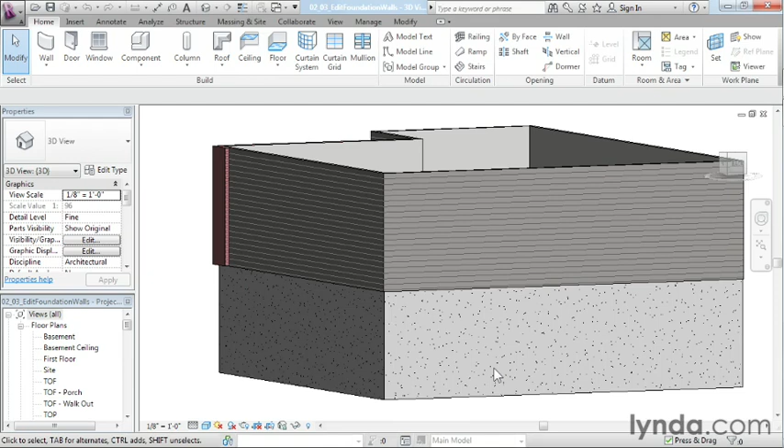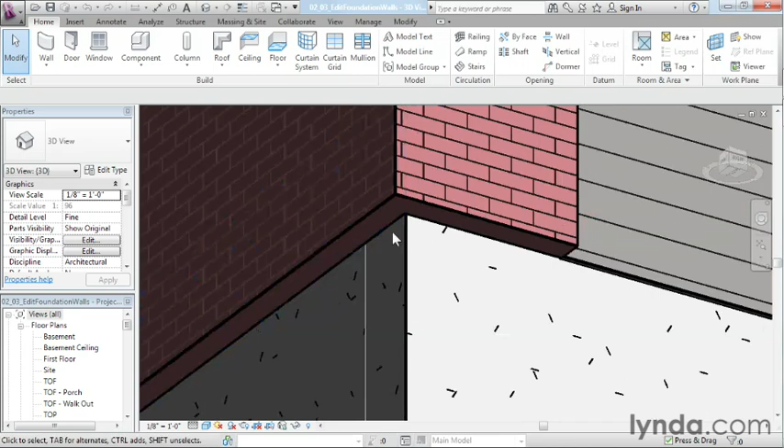Now that we have the foundation walls underneath our structure up above, we can see that there are actually a few issues that we need to take care of first. First off, if I move this building around, we can take a look at this and we can see that there's brick currently floating in midair. Now that's not usually a good thing whenever you're talking about the structure underneath a house. There needs to be something that's going to support this brick. So we're going to need to make some adjustments to our foundation walls there to be able to support the brick.

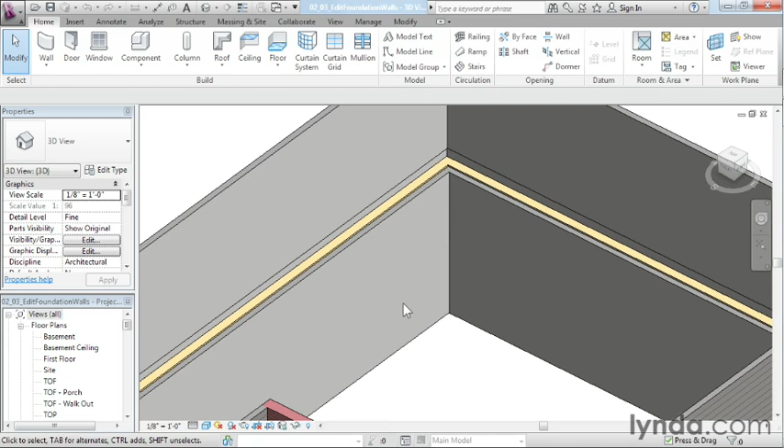Also, we currently have the same type of foundation wall going around the perimeter here. Now, that's not necessarily a bad thing, depending on where we want to look at this. The only thing is, though, that part of this wall ends up having 2x4 studs right here, along with gypboard, in order to frame the wall out. Now, back here, which is going to be our storage or utility room area, we don't want to have any sort of wall framing there, which is going to be an unfinished space. So we're going to need to use a different wall type in that location as well in order to communicate that properly. So in order to do that, we need to go back into our basement floor plan view and start to make a few modifications.

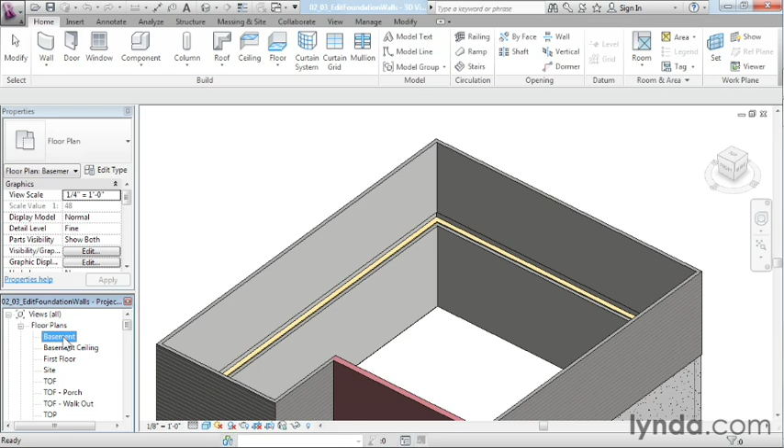Now I'm going to start off by zooming in on this corner of the building. This part of the building has grade going up much higher on it than this end of the building. So the ground is much lower over here than it is over here. As a result of that, we need to have foundation walls that go down deeper in the earth over here as opposed to over here. The reason is whenever the ground starts to freeze, the building might start to contract, expand, move up, move down. And if your foundation walls aren't deep enough, they won't be able to resist those forces. We need to make those adjustments so that it has the right depth of foundation wall in both locations.

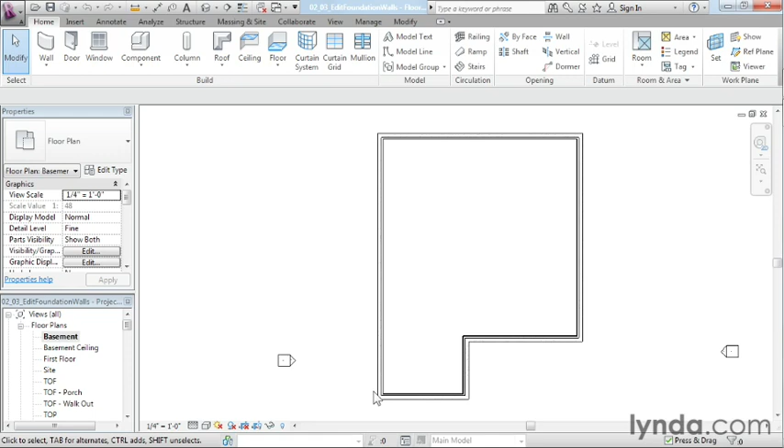To begin with, I'm going to come down to this corner of the building, and I'm going to come up to my annotate tool. Now, there isn't a real nice and easy tool in order to break this wall up into different depths, so we're going to need to use some tools to sort of give us some guidelines, if you will, in order to be able to create the conditions that we need. Now, I selected detail lines off of the ribbon up above, and I'm going to click on the little intersection right here and just draw a little line coming off the side here.

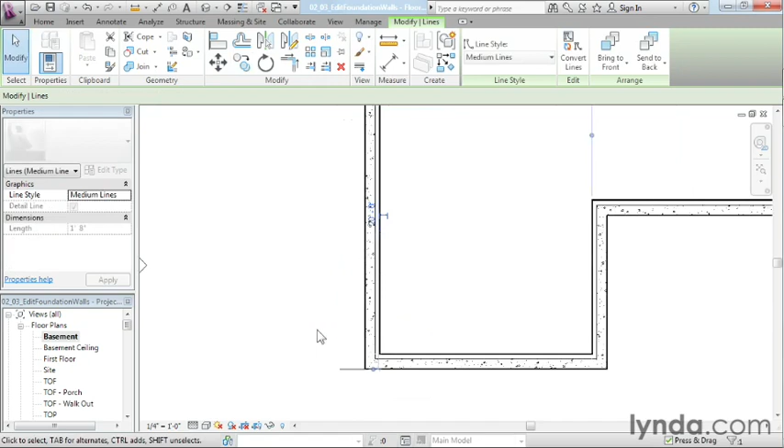Next, I know that depth needs to be 20 feet coming up. So I'm going to select this line that I just drew off of the edge, and I'm going to select the copy command, pick a point, and then type in 20 feet. And that's just going to be my baseline as to where I'm going to be able to split this wall at. I'm going to split the wall right there. I also know that I need to make another line that's just 2'6" up from this one. Now, the reason why I need to do that is that there's going to be no finished material on this little wall section right here, but this wall segment is going to have that 2x4 stud with some gypboard on the outside of it, like it currently has.

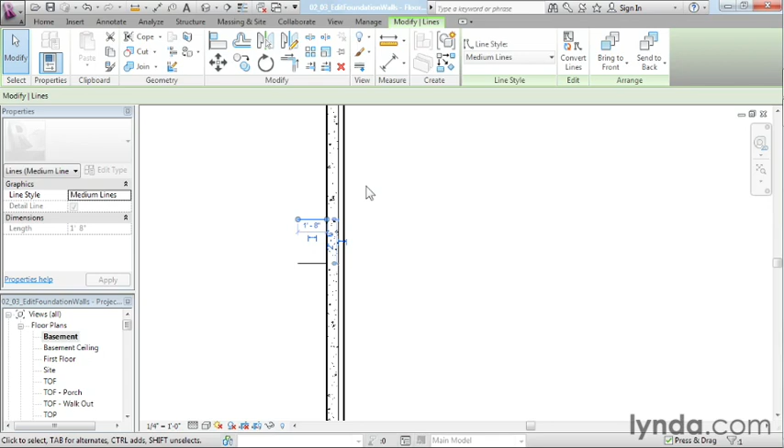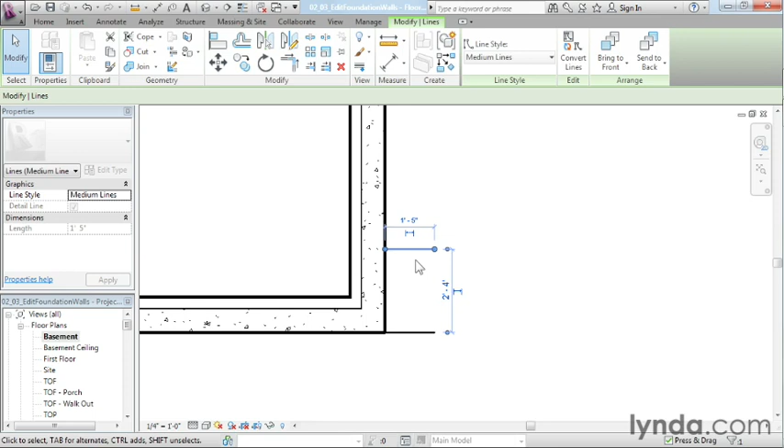Now, I'm going to move to the right-hand side. I'm going to draw in some more of these lines. I'm going to draw a line right here, straight out, and I'm going to copy this one up. I'm going to copy it up 2 feet 4 inches. From here, I'm going to make another copy of this line, and I'm going to copy it up 7 feet 8 inches.

Now we're going to use the split tool in order to split this wall up into individual segments and this wall up into individual segments so we can change the properties of the walls in those locations. So I'm going to select the wall and come up here to the split element tool, oftentimes just called the split tool. And then I'm going to move my little symbol right here. It kind of looks like an X-Acto knife blade.

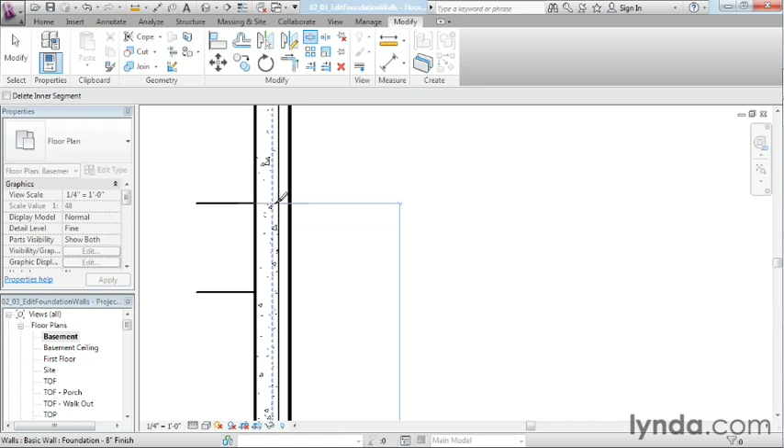And I'm going to move until it's in line with this line right here. And you'll see that gray line show up. Whenever you see it, click and do it again in both locations. If you do it right, you can see that you can sort of highlight over one, over another segment, and over another segment. We now have officially 3 different segments along that wall.

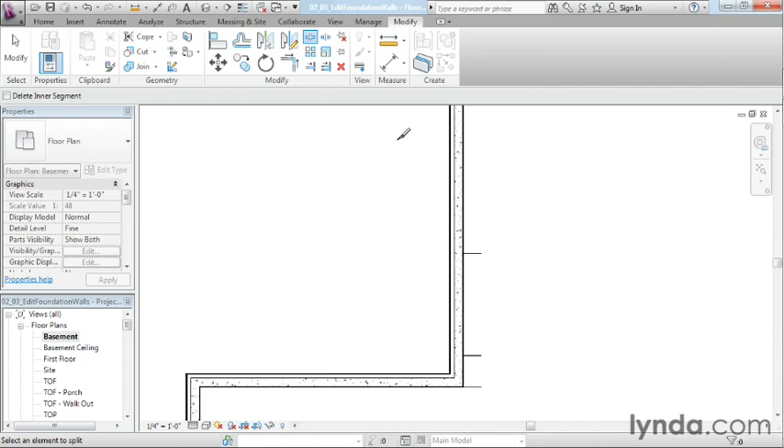I'm going to do the same thing over here next. Select on that, come up to the split element tool, click once, zoom in a little bit just to make sure that I got it accurate, click again. Now I have this wall segment and this wall segment. Now I need to make some adjustments.

The first adjustment I want to make is going to be to this wall right here, as well as this wall here on the side. This foundation 8-inch finish is mostly good, except it's not going to be supporting the brick up above it very well. So in order to support that brick up above, we need to change this to be a foundation 12-inch finish wall. And you can see how it added in that extra little bit of material, which is actually 4 more inches of brick on the outside.

One other change I want to make to these walls, and I'm just going to highlight on both of these again, is I'm going to change the top extension of these walls to be -7¼ inches. I could do -7.25 if I wanted, and I'd get the same results. Just make sure to put in the little inch sign, or else it'll do feet instead of inches.

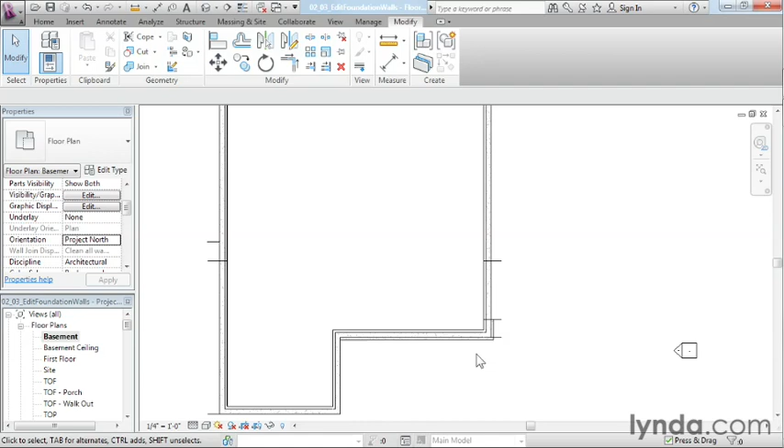Now, what this is going to do is it's going to change this brick ledge, which is the part that got added when we changed the wall type, so that it's down far enough that it can support the brick up above it and have the right appearance that we want on the outside of our building.

I'm also going to select on these walls and look at one more setting here. We're going to take a look at what the base of it's set at. And right now it's set to go out to the walkout. We don't really want that. We just want it to go to the top of footing here. So we'll select on the TOF, the top of footing. And that'll make these walls just a little bit shorter, which is what they need to be because they don't need to go as far into the ground.

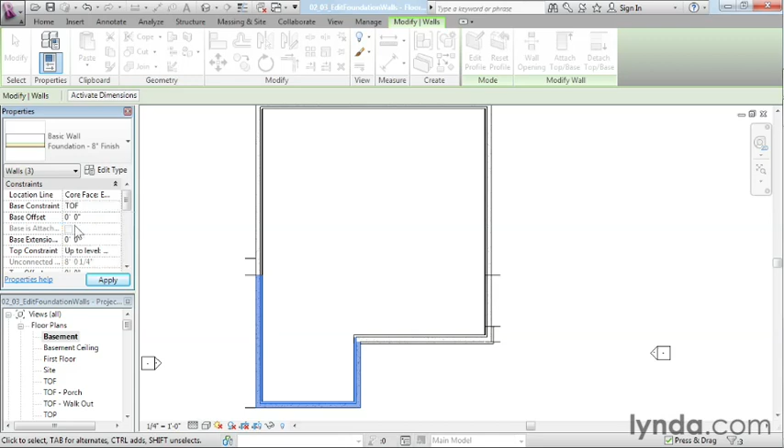Now we're going to do the same thing with these walls, where I'm going to select on these walls, and I'm going to change their base constraint to also be the top of footing because it doesn't need to go as deep into the ground. Also, these walls don't need to have that finished material associated with it. So I'm going to select here in the type selector list and pick on foundation 8-inch. And you can see how I removed that finished material on the inside of the walls. So we no longer have the 2x4s and the gyp material on the inside of those walls.

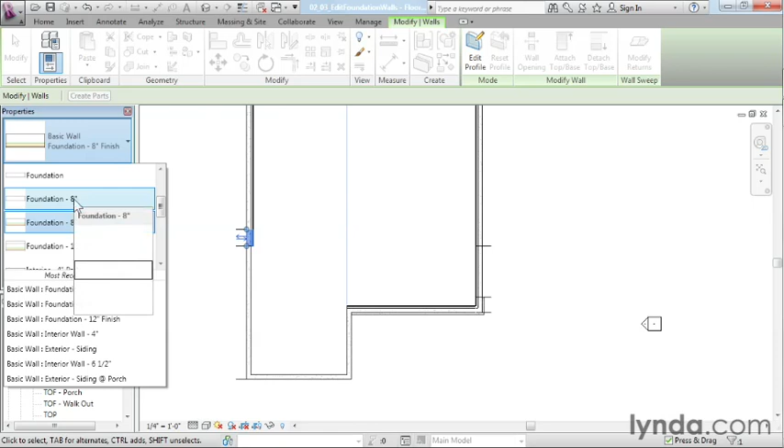Now, in this location, the depth happens to be correct, but the wall type just isn't. So I'm going to come in here and I'm going to change this to be just a foundation 8-inch so it matches up with this material right here, this wall right there. Now you can see that that's been changed. And these walls are already set with the right material and the right depth.

The next thing we can do is we can remove these lines because we no longer need these reference lines. They don't really affect anything. They'll only show up in this view, but when we're working with our floor plan views, they'd kind of be getting in our way, so we just don't need them.

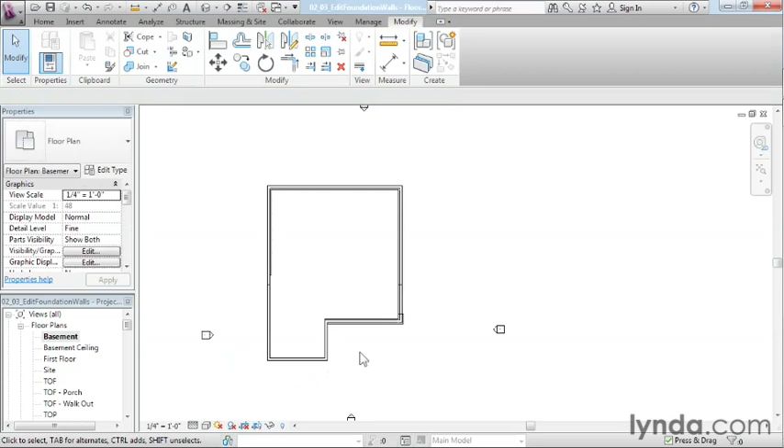By using these steps, you'll be a success in placing the exterior foundation walls in any of our Revit projects.